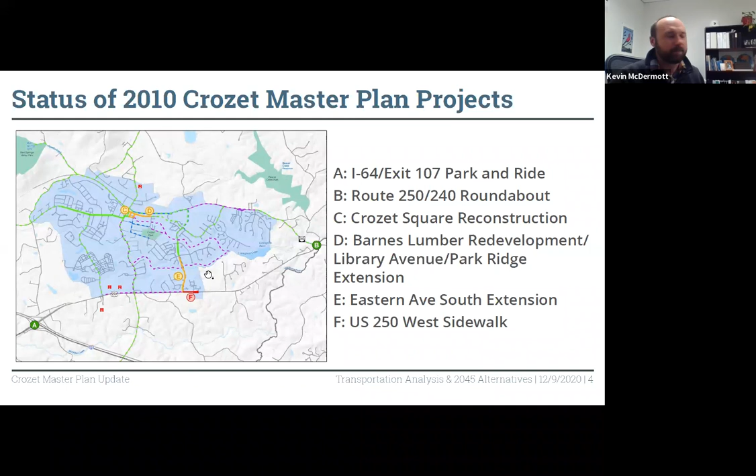That project is in the bid process right now. Design is essentially complete and we're trying to get the construction going on it. It's fully funded. So that was just a quick update on some of the ongoing projects.

Now to get into this study we've been working on for the past six months. This study was actually funded partially through the Barnes Lumber project. During their rezoning, they offered a proffer to provide some funding to allow the county to evaluate how that development would impact transportation operations in the downtown area.

We took that money, and since it was coming along at the same time as this master plan update, we thought it would be better to expand that to the entire Crozet development area and look 25 years into the future, so we could get a better idea of how things would develop in Crozet overall, and how improvements in one area may affect transportation operations in another.

So we took the money from the proffer, added some county funding through our CIP, and started this study. We hired a local private consultant, EPR, to do this study for us. They are looking out 25 years to 2045 to see what development would look like and how we could expect traffic operations to look, by modeling intersection operations using traffic modeling software, estimating trip generation by uses, and coming up with this picture of what 2045 would look like.

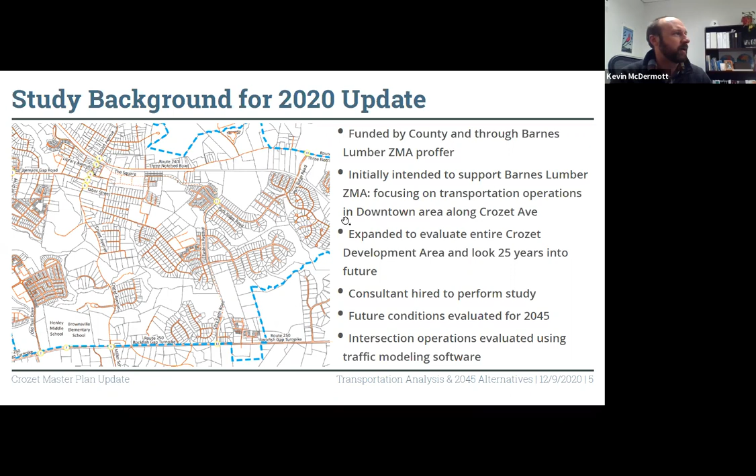So we needed to develop the current traffic volumes at all of those intersections. At this time, because of the pandemic being ongoing, we couldn't just go out and count those traffic volumes, which is what we would normally do. But because the volumes are down related to the pandemic, we needed to come up with our own estimates for that.

Most of these intersections have been evaluated in the recent past, so we took data collected over the past couple of years and applied a growth factor to come up with what we thought the current values were. We checked that growth value by looking at changes in other intersections over years to come up with a reasonable number.

If that didn't work, we looked at estimates of volumes along the corridor and were able to come up with a general number for what we thought was occurring at any one intersection. We look at those during the peak hour, so we want to know what's happening during the morning peak and the afternoon peak. If it works at those times, it works the rest of the day, because you don't have any other peak hours.

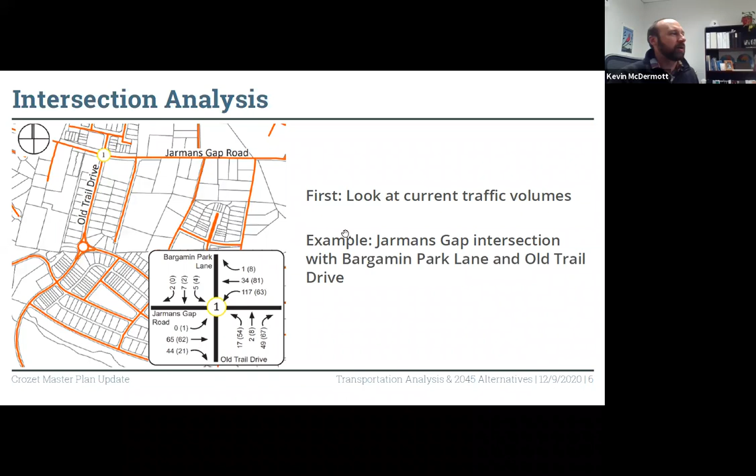So those are what we were trying to develop those numbers for. Regarding the modeling analysis, we use Synchro, which is a modeling software that you can use to generate operations at intersections.

This is just an example of the kind of thing that we look at when we get those results. For example, this is Jarman's Gap Road at Old Trail Drive. You can see each of the approaches is listed, along with all of the movements from those approaches.

So Jarman's Gap Road eastbound right, and eastbound left and through—those two movements are in one lane. You see all the movements for each one of the intersection legs, and then we put the storage, which shows you how much room is in any one turn lane.

So there's a 30-foot turn lane for that eastbound right movement. There is an effective storage length, which shows you if there's additional space that people could utilize for that. So that's what that is right there.

What the modeling analysis gives us is level of service, delay, and queue for each one of those intersections. The level of service is an A through F grade, and it's based entirely on the delay. So if you have to wait under 10 seconds at an intersection during peak hour, they'll give that an A.

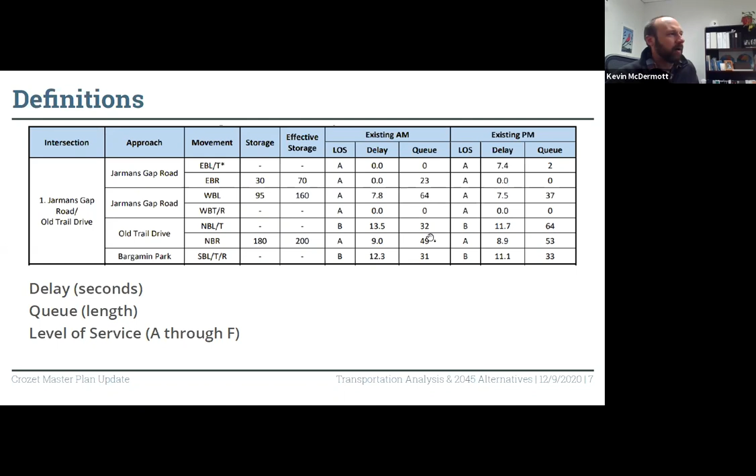So I just wanted to give you that brief overview of how this works.

Then getting into the future traffic volumes—this was something more difficult that we needed to look at to identify what we thought traffic volumes would be in 2045. First, we took those existing conditions volumes that you saw in the previous slide, and then we add a growth factor to that.

Just like I said, how we added a growth factor to some of those older intersection analyses to come up with what we thought was the current time, we would add that growth factor every year out till 2045.

We also looked at all the development that we expected to occur within the Crozet development area over those 25 years. The growth factor is supposed to account for outside traffic that would be coming in, and this accounts for the new traffic generated within the area.

What you see here is the information we used from the development pipeline, which I think you've all seen—it's available on our website. So we looked at all the approved developments in there, what they were going to be developed as, and we used the ITE standards, which is the traffic engineering

standard for trip generations. We used that to come up with the number of trips we thought any one use would put onto the road.

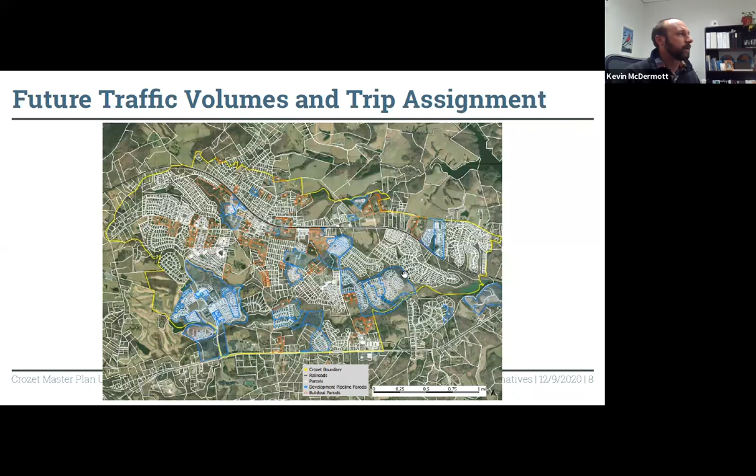So now I'm going to get into the analysis of some of these specific areas. Like I said, we looked at 12 intersections all around Crozet, but we really focused on two main areas, the downtown Crozet area and the US 250 area, because those are the areas that we saw would likely have the worst traffic operations in 2045.

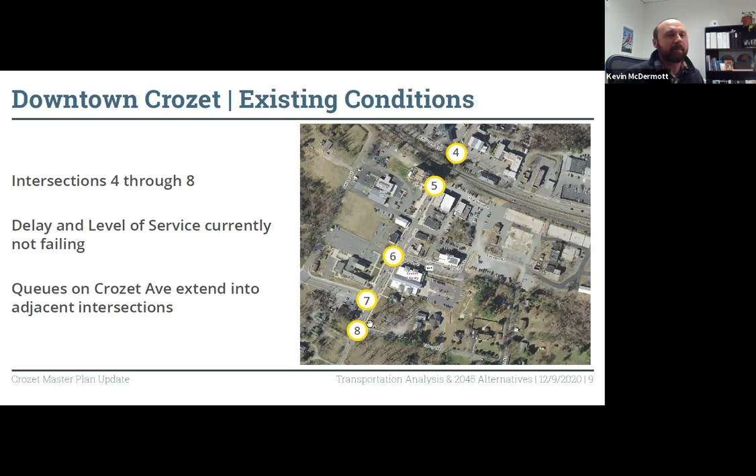So those are the ones we needed to focus on. The first one is intersections 4 through 8: that's 3 Notched, the Square, Library Avenue, Jarman's Gap, and Tabor Street. This is existing conditions. Right now, none of those intersections are failing, but some of the queues are extending into the adjacent intersections. So people waiting to make a left turn onto Jarman's Gap from Crozet are blocking Tabor Street, a lot of times in the peak hours. That's the kind of thing we see happening, but it's not too bad right now.

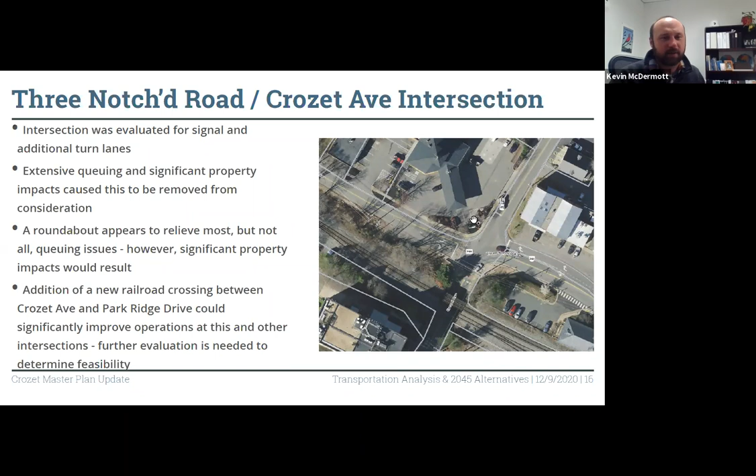I will say that if we were able to get a new railroad crossing somewhere to the east of this location and a roundabout, you would see nearly perfect operations in this area, but those are expensive propositions. So it would take a long time to move forward, and we still have to look at some of the feasibility issues with those.

That's really the end of the downtown section. In a minute, we'll move on to the US 250 area, but we wanted to take a break here and see if there were questions or comments that you all had.

Allie, you want to call on people or? Yeah, sorry, I was muted. Does anybody want to start us off? I see there was a couple questions. There were some comments in the chat.

Somebody asked also about your data, as far as 2020 housing units and population, and 2045 housing units and population. I'll let you address that, or we can go to some. I'm not sure exactly what the question is asking, but I'll say, how did you figure out the difference between 2020 and 2045?

So, what we did was we used that development pipeline and assumed the development that we had already approved would be built. And with each one of those, if it were approved for, say, a single family residence, using the ITE manual, it would give us a number of trips that we would expect to see from that single family residence. So we did that for the entire Crozet area and came up with a number, and used that for both the development pipeline, those approved projects, and the projects that we expected to be developed in the next 25 years based on the previously approved Crozet master plan, with maybe some minor tweaks, thinking that there might be some changes to land use.

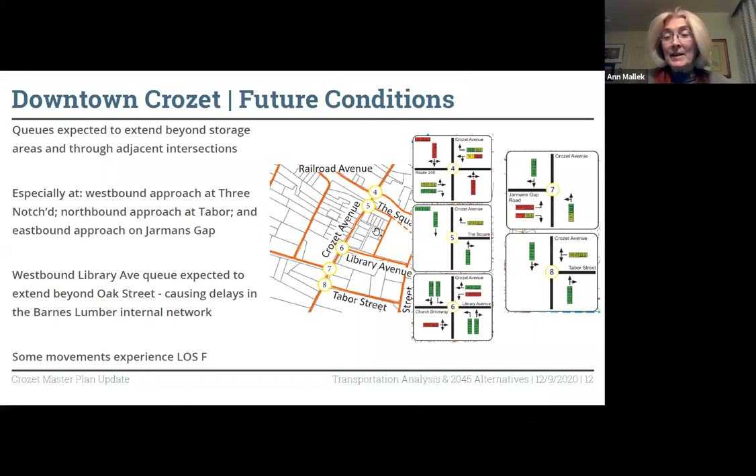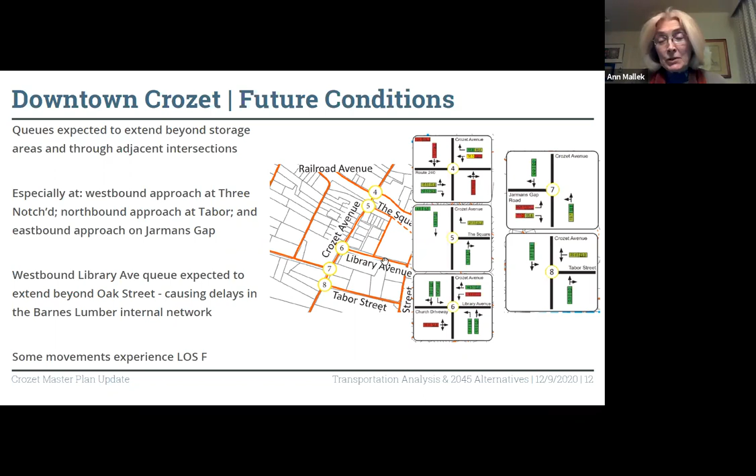I will say, first of all, we found out from VDOT that we're not able to fully move that light at the square through the Crozet Square project. That will remain because of sight distance issues there. If you're coming out of Crozet Square and want to make a right turn, which is the only way now - you're no longer going to be able to make a left turn out of Crozet Square, only a right. The problem is if you turn to your left, you can't see vehicles coming because of the mud house, so there are sight distance issues. They required us to keep that signal only for northbound traffic, so if someone pulls up wanting to make a right from the square onto Crozet Avenue, they'll be able to get a signal to do that without pulling out and getting hit by somebody they didn't see. So that light will remain partially - it won't stop vehicles heading southbound unless there's a pedestrian.

But I'll point out also that we asked the consultant to look at that coordinated signal system, and it didn't work. The problem being you couldn't cycle it fast enough to clear the Jarman's Gap queue and the northbound queue on Crozet Avenue - it kept building up. So we asked them to look at it, and in their opinion it wasn't enough to deal with the situation. We may want to do it if there's a short-term improvement project out there - we can look at it, but in the long term, unfortunately, that's not going to do it.

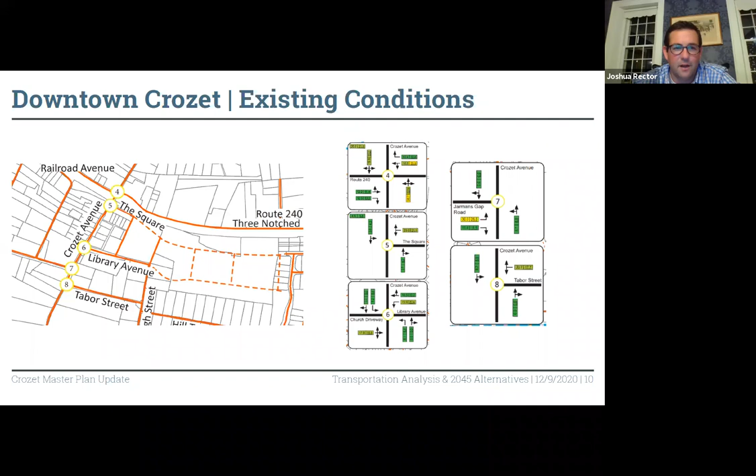What about addressing the school traffic? I know it's not an issue perhaps this year, but in past years, along especially the 250 corridor, when schools are loading or unloading children, it can really back up traffic significantly, more so even than the typical rush hour traffic I'm familiar with. Have you guys studied that at all, and is there anything coming up to address that?

This is just a pause to talk about downtown Crozet. I'm going to follow up and talk about that 250 area next. Apologize for the side note.

So Valerie? Yeah, thanks, Kevin. This is so helpful and really interesting to see all this information.

Forgive me, did you mention at the beginning how this data would be affected with regard to the completion, hopefully someday soon, of the Eastern Connector? Will these improvements still be needed, or does this assume that the connector has been built?

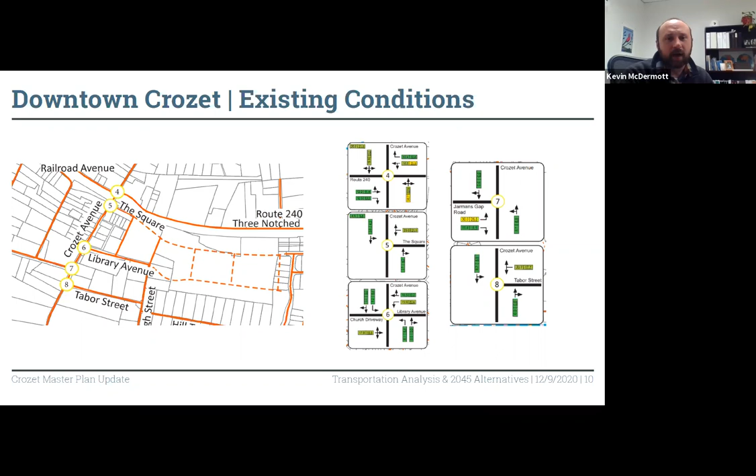It assumes that the connector, at least south to 250, is built. What we did was use professional opinion to assign a certain percentage of the traffic that would move over to that connector.

Okay, you're right, I missed that point earlier, and I didn't realize that's what you were specifically talking about with your last question, Allie. So thank you for connecting the dots for me there.

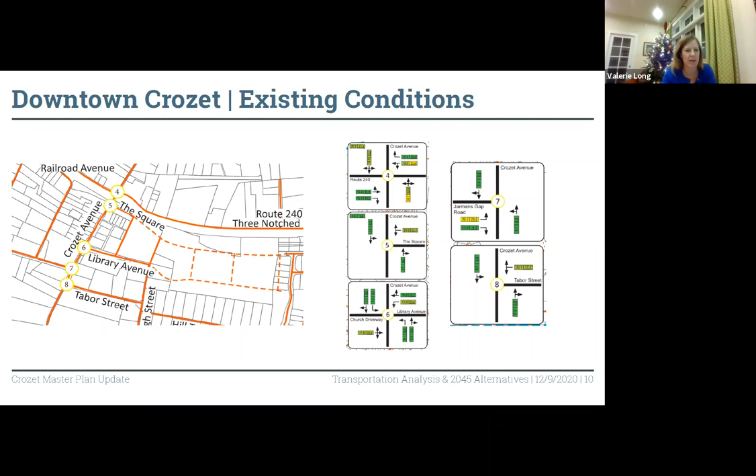I think we have a lot more to talk about. I don't know if you want to take maybe one or two more questions. Yeah, that's fine, just focusing on downtown, but also some basic presentation. Jenny and Joe, either of you guys have... and Tom, I know.

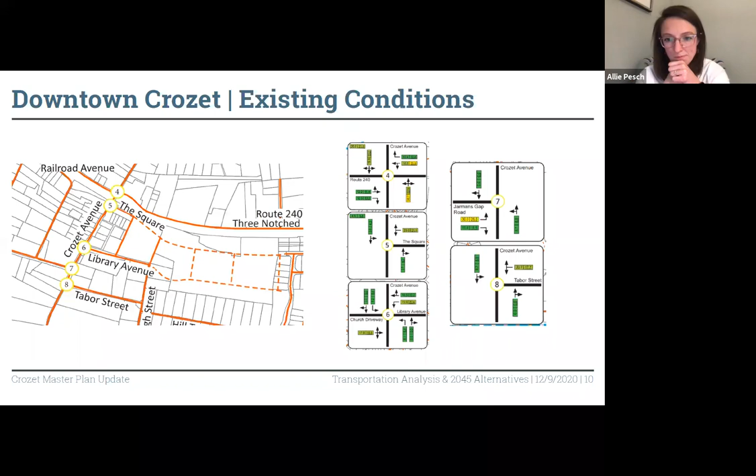I guess I can wait. I was just gonna help you pull some things out of the chat, but if there's not enough time...

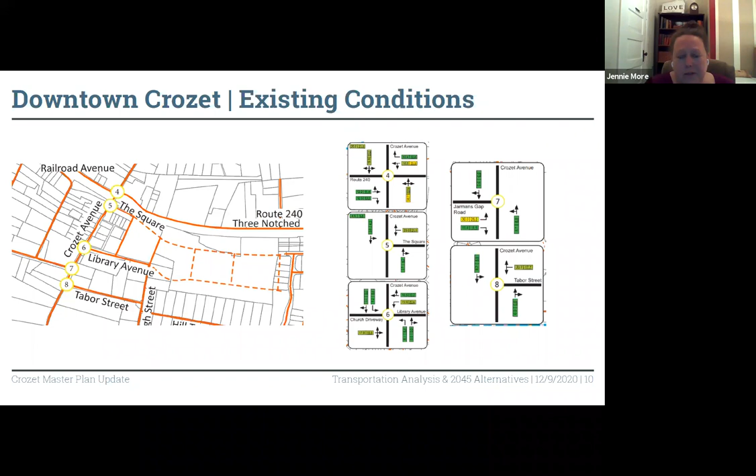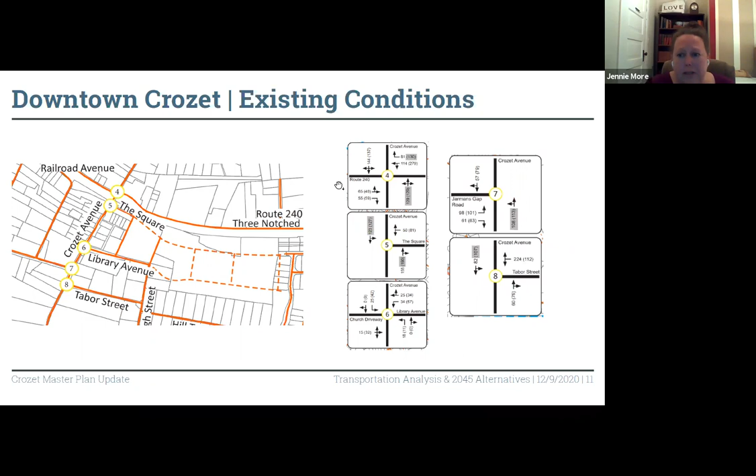One of the things I saw that was interesting was what Josh was asking about school traffic. There's a question in the chat, not specific to this, but about end of day school traffic and its impact on intersections like Jarman's Gap and Old Trail. It's kind of a technical question for Kevin about how that interacts with peak hours when those aren't necessarily at the same time.

I'll get into that a little bit when we get down to the next section.

And then there's something staff could take on: if you're using your trip estimation out to 2045, it starts with the number of housing units. People want to know what that estimate is, because that should also help us come up with a population range. Maybe Rachel could have that.

Yeah, I saw that same question in the Q&A, so I attempted to type out an answer. Essentially, this study is probably not the best proxy for population because they use traffic counts, not people counts. We did do a 2019 growth management report that tries to give population ranges based on zoning versus comp plan, and I can share that with the group if there's interest, but I don't think this study is the proper source.

Well, it does seem like it's starting with an assumption on build out, and then generating traffic instead of people from that. So it seems like we could still pull, if we're going to have whatever single family detached units, assign a number to that for people, like we've done in the past when Elaine was helping us with projections.

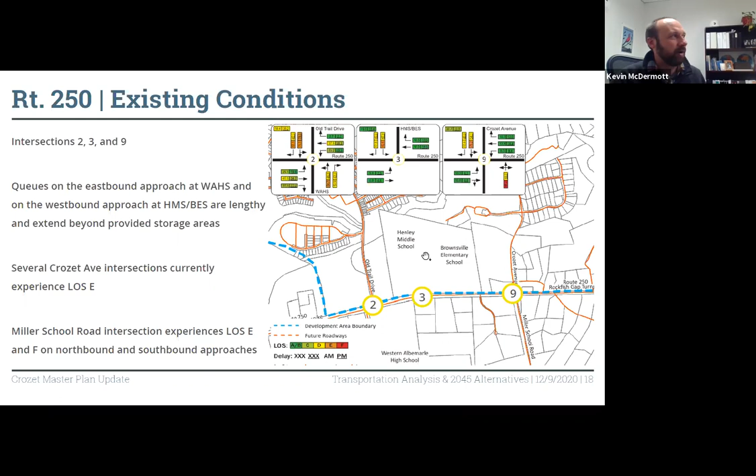So my point here is that I think this, as we look at this study, is really coming out to be a priority that we would probably want to address as soon as possible. I'll also point out that by opening up some of these intersections, I think we would probably see some improvements in the downtown Crozet area, because some people adapt and find the easier way out. So maybe people would stop going through downtown to get to areas east of Crozet and use 250 instead if they could easily get through. So I think there would be some benefits to that.

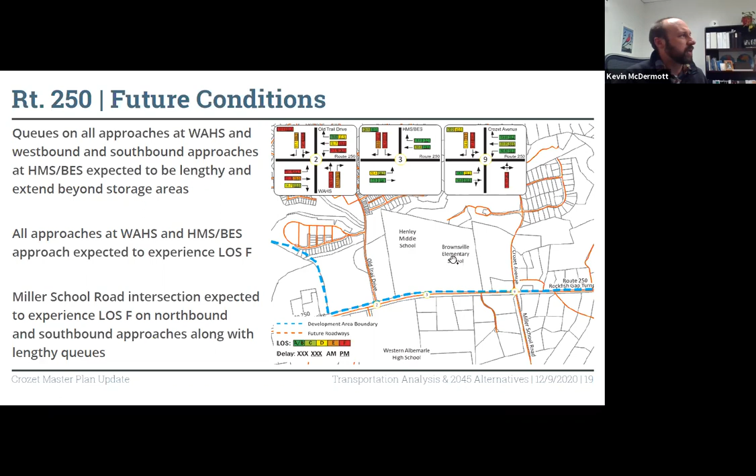So what we looked at with this one - and this is interesting because we don't have to look at different options for individual intersections - we put additional turn lanes at these intersections and it just didn't work. There's really not the bang for the buck you would need to see if we were to add an additional turn lane through here. So really we were like, that's not going to work, let's just go to the next step.

Really what we're looking at here is that a 2-lane roundabout at both of these intersections would correct all those issues that we see out there. And those are 2-lane roundabouts, so they would also require 4-laning 250 through this segment. Now, the good thing is that this doesn't have to all be done at once - this is the type of project that we could phase. I think right now the biggest issue is probably the Old Trail Drive intersection.

So we could start with that and then do another one in future years. So it's something that we could build on over time.

With all of these improvements, with the two two-lane roundabouts, they would operate at a level of service D or better, which is great for traffic. You don't really want things operating better than level of service D during peak hour, because you wasted money addressing just 15 minutes of a problem.

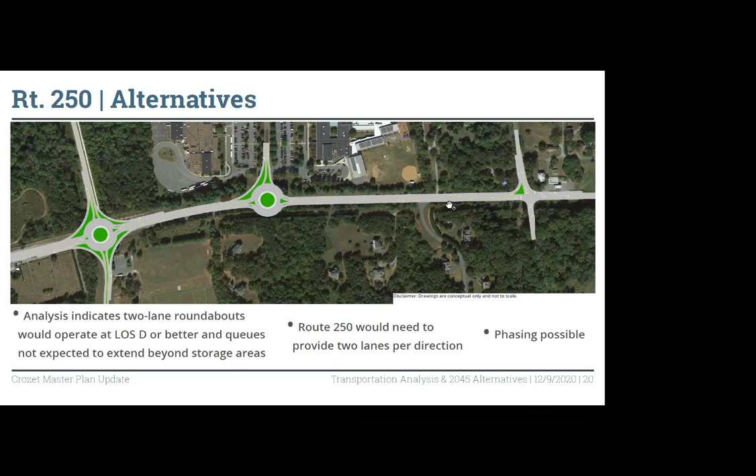That's Miller School Road is what you're looking at right there, not Old Trail Drive. Is that right? Okay. Oh yeah, I'm sorry, you're right. That's Miller School and Crozet Avenue intersection. This is Old Trail Drive in Western Albemarle. Sorry about that, Ian. Thanks for correcting.

So this is really the only option that we've looked at for these. Like I said, no additions of turn lanes would really help, but we could phase this to address the major issues first and eventually get to this.

So that was actually it for the 250 section. As I said, we didn't have to look at a lot of different things, but there are some serious problems out there right now. We may still, I will point out that we've had discussions about trying to add some turn lanes at that Western Albemarle Old Trail Drive. And if we can do something like that for really inexpensive, it might provide some short-term benefits out there, and we will continue to look at that. But in the long run, what I showed there is really what's needed.

So once again, I'll open it up to questions on this, and we can talk about some of the other questions you had about the other area as well.

Just real quick, it's the most recent chat question, but how can you be a little more specific? Since Miller School is the one that's failing already, can you explain how those roundabouts would address the Miller School problem?

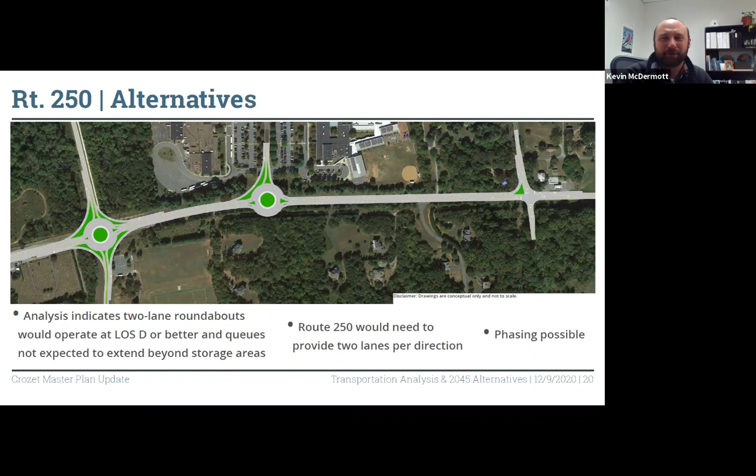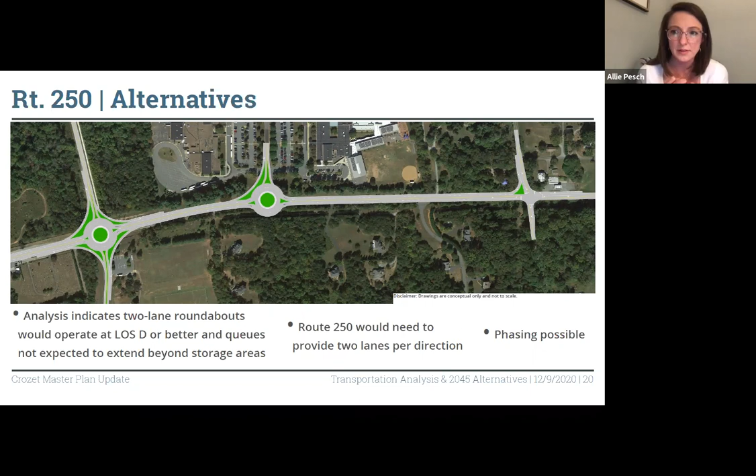There's a few general questions that relate back to downtown, so I wanted to bring up one I missed before. Phil asked: at Tabor and Crozet Avenue, have you considered lining it up to make it a four-way stop with Tabor and Jarman's?

It was a consideration. When you're looking at realigning a road through a new alignment, you may get to the point where the expense is just too great. We talked about the need for taking property - I think that would end up taking the entire parcels across the street, which is a pretty historic building where Arbor Life and a couple other tenants are. So aligning those is difficult.

I guess I'm interested, because a lot of this is so long-term, and obviously Eastern Avenue is the closest thing to being built, and it's still so far away. These short-term solutions are pretty interesting to me, and from what I hear, the community too.

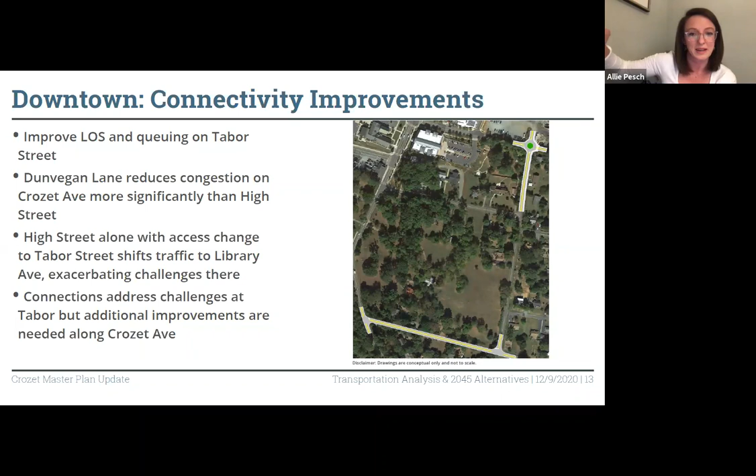Well, so what we're doing right now is we're trying to get a feel from you all, from the community, as to the places where you think we should be focusing improvements that are called out in the master plan, and what some of those options are. So that's really the step we're in right now, getting these improvements into the master plan.

We have already prioritized, like I said, the Eastern Avenue improvements, the improvements at Crozet Avenue and 250, and there are some other more minor improvements that have been prioritized in the past. Most other ones are bike ped.

So once these things get into the master plan, we then prioritize them, and they then compete with the projects across the county. We try to look at them from a reasonable sense, trying to see what we think really should be our priorities based on safety, land use, and economic development. We rank projects based on that, and the board works through that process with us.

And then once that happens, we move to starting to look for funding for those projects. So right there, we're already a couple years out probably when we're starting to look for funding for those highest priority projects. And then once funding comes through, depending on the project, it can be anywhere from 2 years to 8 years to get anything done, depending on the scale of the project and what type of funding we've gone after for it.

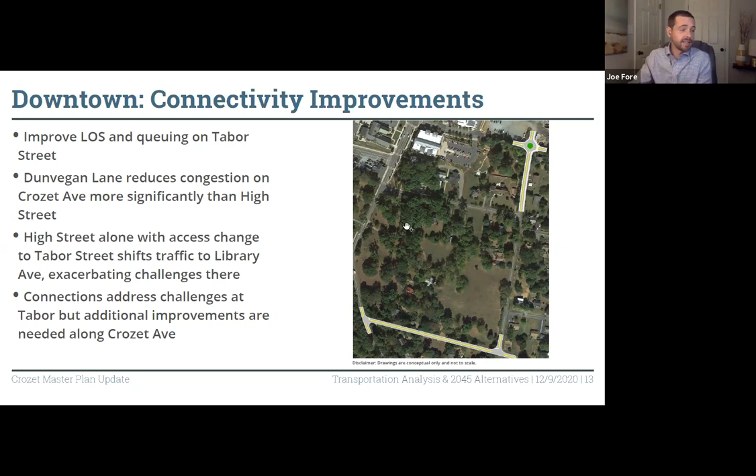Joe, saw your hand raised. Yeah, thanks Allie. I just want to circle back to a couple of the downtown improvement things. I know that was just Kevin, you're talking about getting feedback. I just think Allie's suggestion, this idea about, for example, Tabor or the right-in right-out, these sort of shorter term stopgaps -- some of these might be, at least for me, very attractive, especially if you couple something like the right-in right-out on Tabor with the extension of High Street, and fairly soon.

At least on the sort of glacial timescales we're talking about for some of the bigger projects, with things like the lumberyard redevelopment, which will be relatively new -- I think that's a positive one. Your suggestion here about going around the Methodist Church, this kind of quadrant -- I forget the exact term, one was the quadrant and the other was the big circle, which isn't a term -- to me, I think these are both pretty elegant solutions. That's a real thorny problem, and to be honest, I wouldn't have envisioned something like that, but just looking at it, that's a really tricky area, and they both seem about as good as anything else I can imagine.

So obviously those are longer, more expensive projects. I kind of echo Allie's point about looking for some shorter term stopgaps, especially that High. And the last thing I'll say is I was really glad to hear you talk about the prioritization and really focusing on the other railroad crossing. I think that's going to be a huge relief.

And especially, I know a lot of us, if you're on things like Nextdoor, we hear a lot of stuff about Park Ridge, people complaining about all the traffic that's now being dumped onto there as basically the only eastern outlet, especially with the opening of that new Eastern Ave connector. There's a lot of people not thrilled about all the traffic being dumped on Park Ridge as the only outlet to 240. So, yeah.

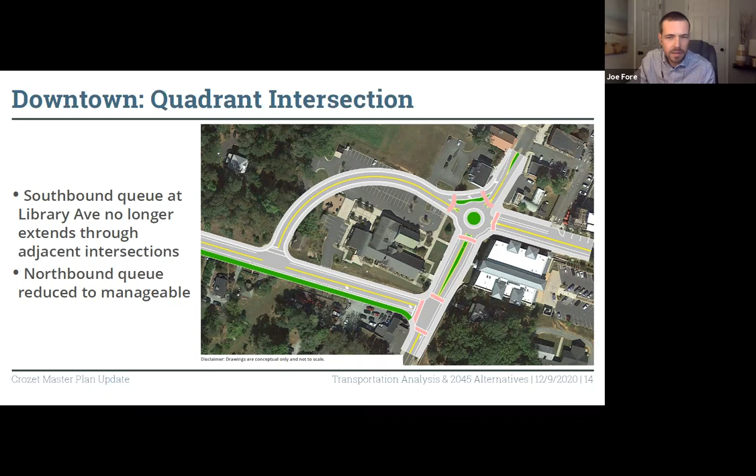Joe, did you still have a comment? Yeah, my preference is probably for the Quadrant. I'm not as bothered by the roundabout, especially since, actually Kevin, could you jump back to the big circle? Because Allie, you're concerned about walkability there, and your comment about the relative safety or comparative safe feeling of traffic lights, helping and assisting in crossing. I guess I don't think that's going to be as big of an issue given where the traffic lights are, right, they're down on Jarman's Gap. It really seems to me like most people are going to be crossing up near Library. And I guess if your concern is that roundabouts are tricky to navigate with pedestrian crossing, that's one thing, but especially going across Library or wherever, I don't see a huge benefit to the lights. But, I think, sorry Allie.

It's not just safety, I guess, it's more just like friendliness. I'm sure that they're both safe, but it's more just making the walker feel like they're not inconvenienced by the traffic. Yeah, I guess I don't personally feel that way. I'm glad Valerie asked the question, and the scale in Old Trail does seem relatively friendly.

I think most people here have feelings one way or the other, but it seems like cost might be one of the overriding concerns. We'd be curious to see, as you guys go forward, relative costs. People may be a little indifferent between the options.

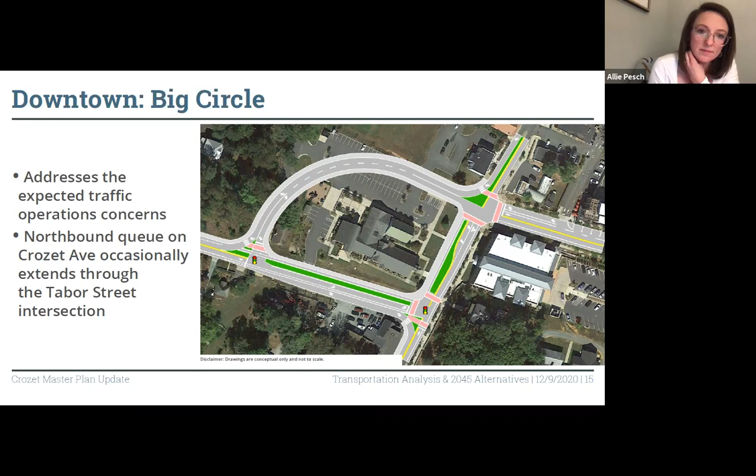Another attendee says the railroad crossing should be the number one priority to connect the north and south downtown businesses. I feel like we got that a fair amount in the Barnes Lumber discussions—people are pretty concerned with being able to get people from Barnes Lumber to the Crozet Pizza area. I know the developer is interested in looking at that, and we'll continue to evaluate it. I think it's a valuable solution.

I know we're running short on time. I don't know if Rachel or Tori had anything else they wanted to add, but if there are other questions or comments, they can be forwarded to me through Rachel, or you're welcome to reach out and I'd be happy to answer them.